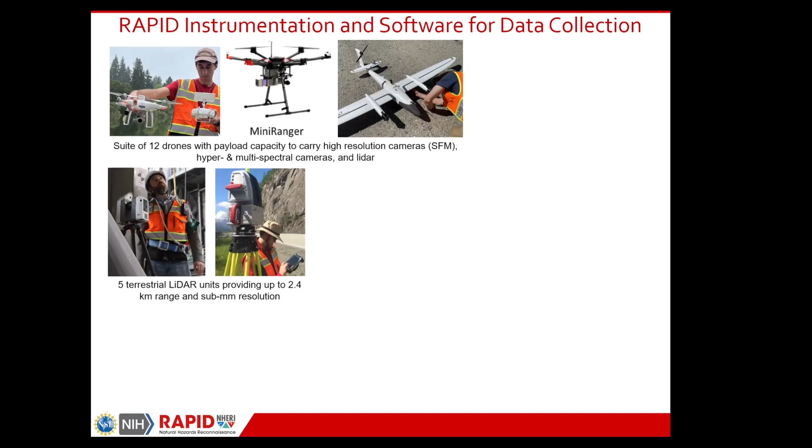This is showing some of the instrumentation that we have. We have 12 drones that can take a variety of payloads, from multispectral cameras through to just high resolution cameras. We have 5 terrestrial LiDAR units that provide both very high accuracy as well as large range. We have total stations and GNSS systems so that you can make sure your data are located globally.

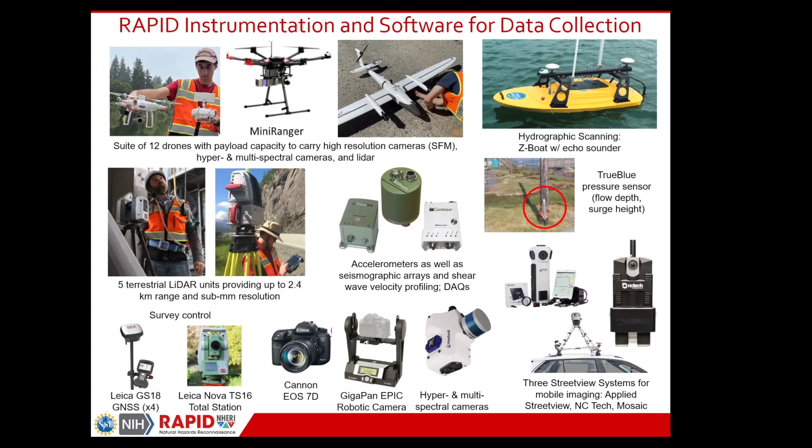We also have accelerometers, high resolution and multispectral cameras, and hyperspectral cameras. We have pressure sensors so you can get flow depth and surge height from hurricane-induced flooding. And then we have multiple street view systems that enable you to collect large point cloud or image data sets that can then be used to generate point clouds.

Some of our newest equipment is health and exposure instrumentation. This enables you to look for contaminants in the soil, to do water testing. We have some water sampling systems that can be drone mounted, so you can fly your drone out over the lake and get a water sample.

We have the drone mounted hyperspectral imaging. Hyperspectral imaging collects essentially images in wavelengths that go beyond the visible, and you can use that to detect chemicals in the environment. Currently we're looking at using that - I've personally been involved in a project that's using it to look for corrosion products, but you can look for a variety of different kinds of contaminants.

The Bruker system enables you to do some in-field processing to see if contaminants are in some of the samples that you're collecting. And we find that the Street View system can be really useful also for public health and exposure research. And then we have a number of instruments that can be used to collect air quality data as well.

In addition to all that, we have field laptops that can be used for preliminary data processing. In the lab, we've got servers in our rapid facility that provide access in the short term post-deployment for data storage and then preliminary processing of your data. And we have data processing servers that you can access to do structure from motion and deal with some of the really large data sets that come in from other instrumentation.

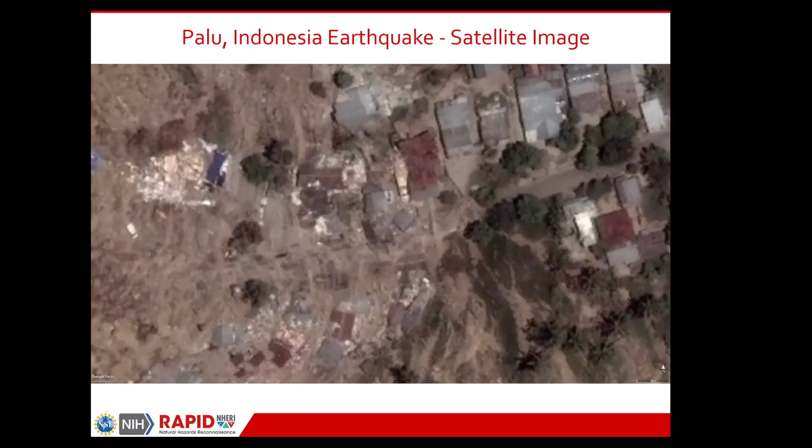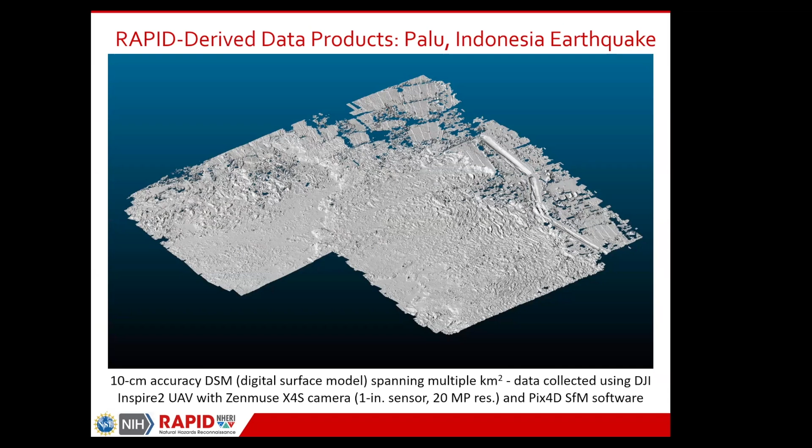Using structure from motion software, it's possible to generate a 3D point cloud of the surface area. This is what that 3D point cloud looks like. You can go in and take measurements and figure out what the elevation of the surface is, what the depth of the landslide area is, etc.

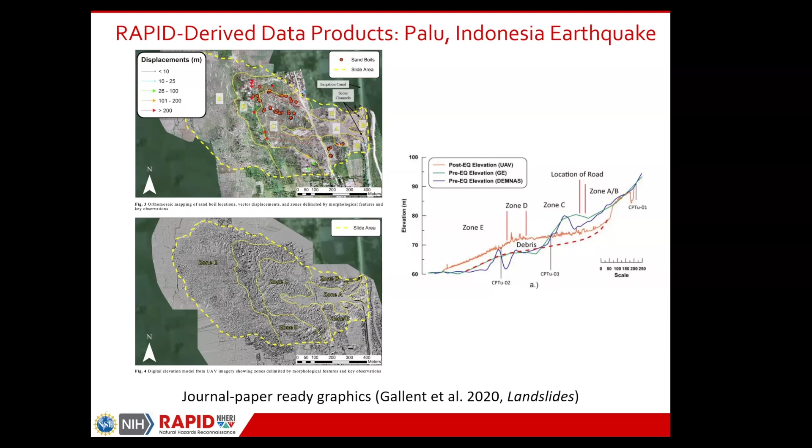The red line is the estimated bottom of the debris flow after the landslide, with the area between the orange and the red being the volume of debris. Using these data, it was possible to get an estimate of the volume of that debris flow and the full effect of it, based on the preconditions and the post conditions. Really valuable information coming from those data, collected just using cameras mounted on the drones and structure from motion technology.

This is another example, looking at a large building damage case, this was post Hurricane Michael, also in 2018, and initial STEER field assessment identified damage to a lot of large volume buildings. A PI from Auburn wrote a rapid proposal, got NSF funding, and then the rapid team went into the field to support activities to collect information on these large volume buildings.

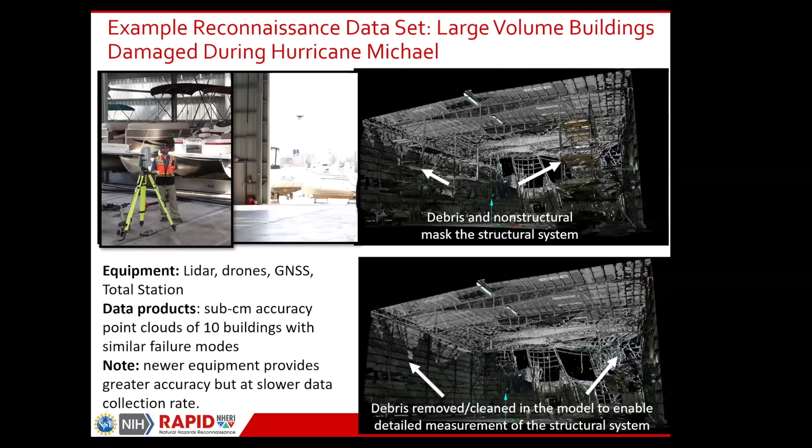This is showing on the right some of the data that was collected using LiDAR equipment. This is mostly terrestrial LiDAR. This gives you an image of the fly through of what those data look like. This is all highly accurate point cloud data.

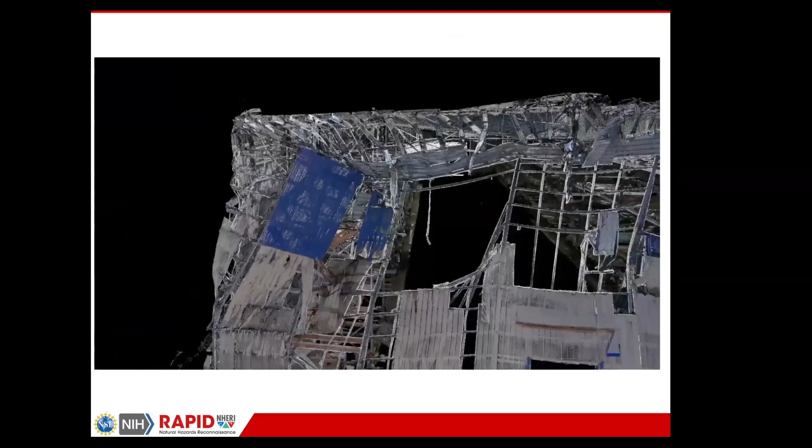You could go in and measure the size of that beam, measure the volume of the building. Using that data, the research team was able to identify the damage to these large volume buildings and come out with data showing there was a common failure mode for 10 of these large volume buildings, determining there was compression from windward wall pressure and then bending due to uplift, causing failure of these roofing systems.

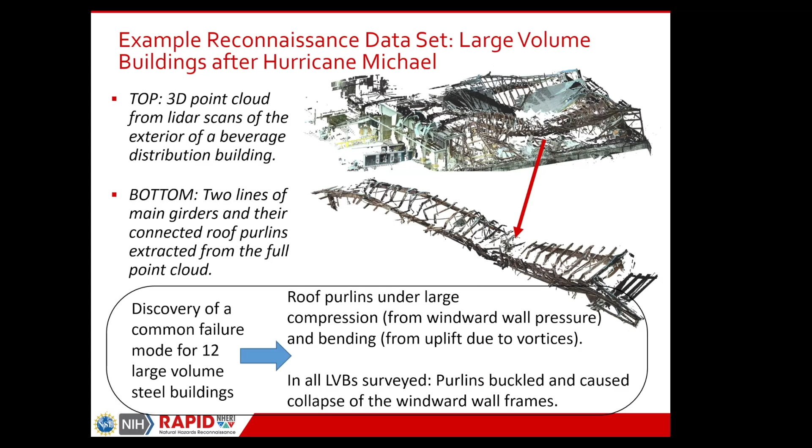A really productive project that started with the rapid steer going in very early, saying, hey, this looks like it might be an issue. This team wrote a rapid proposal to NSF, took the equipment into the field, got data, and eventually came out with a solution to the problem.

This is another data set that came out of the 2025 LA wildfires. This image shows where data was collected in that fire area. There were street view systems mounted to cars, and they drove all those blue lines you see in the top left. There was also high resolution digital and multispectral camera data used to collect data in that region, shown in the top right.

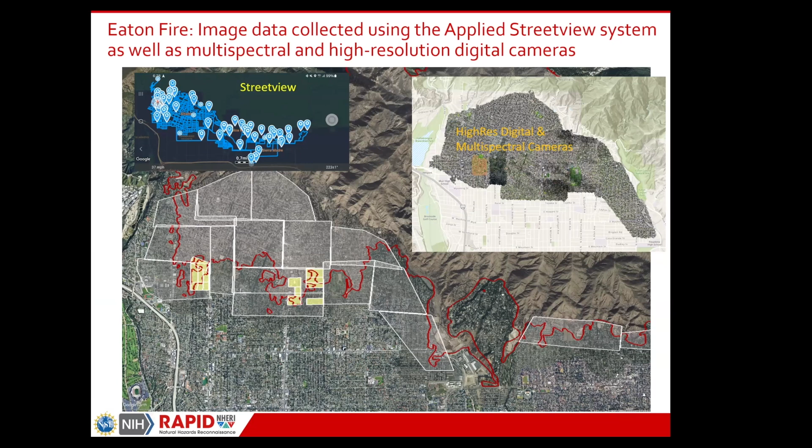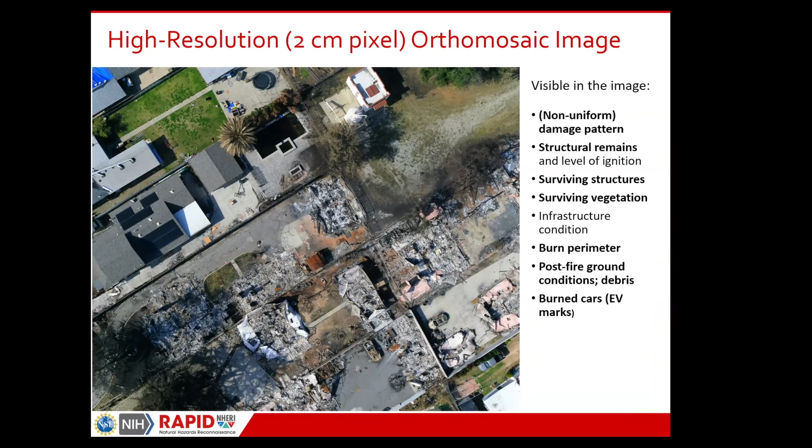This is showing you some of the images that came out of that. You can see from these images that there is non-uniform damage patterns. I don't specifically see it here, but there were places where first responders had noted that electric vehicles, marked EV on the ground, had been burned. You can certainly see the burn perimeter, damage to vegetation, and the surviving vegetation and surviving homes.

Okay, so those are all the exciting things that you can do with rapid equipment. Next step: if you're interested, I would highly encourage you to participate in our summer 4-day training workshop. It happens in July when it's nice in Seattle. It's just a great opportunity to learn more about the facility and the equipment that are available.

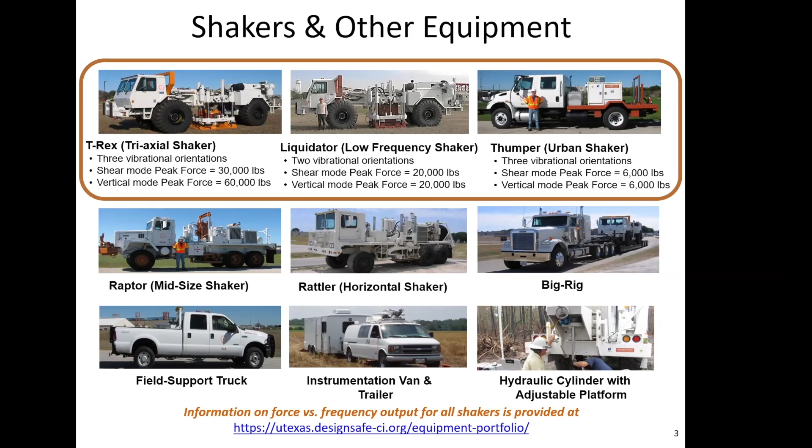We then have these other 2 trucks, Raptor and Rattler. These are just other older Vibroseis trucks that we acquired on donations from oil exploration companies or national labs. Raptor can shake vertically and Rattler can shake horizontally. Then we have big trucks to haul these around with, field support vehicles, vans, instrumentation trailers, all kinds of stuff like that. On the back of our 2 largest trucks, Liquidator and T-Rex, we also have CPT pushing capabilities, so we can push cones and other instrumentation into the ground.

In terms of our instrumentation, we have a lot of dynamic instrumentation. We have about 100 of these SmartSolo 3-component nodal stations. You bury these in the ground or push these spikes into the ground, and they'll sense XYZ shaking. They are each GPS synchronized, so there's no cables that run between them. A lot of people use these to put out grids of sensors on the ground surface, for example.

We have this fiber optic distributed acoustic sensing interrogator, a DAS IU. These are really popular right now, and a lot of people want to use these in their research. To purchase a DAS interrogator like this is somewhere between probably $150,000 to $200,000, so it's not easy for people to get access to one. If you know what that's for and you're interested, we have one available in our equipment portfolio. We also have lots of vertical and horizontal 1 hertz geophones. These have to be connected with cables.

We have several hundred 4.5 hertz geophones and other 24-channel seismographs that you can use, and about 20 broadband Nanometrics seismographs or seismometers with digitizers for recording aftershocks or horizontal-to-vertical spectral noise ratios, deep surface wave testing, and similar work. We also have other dynamic signal analyzers and data acquisition systems, load cells and accelerometers, plus CPT equipment and liquefaction sensors that we're not showing here.

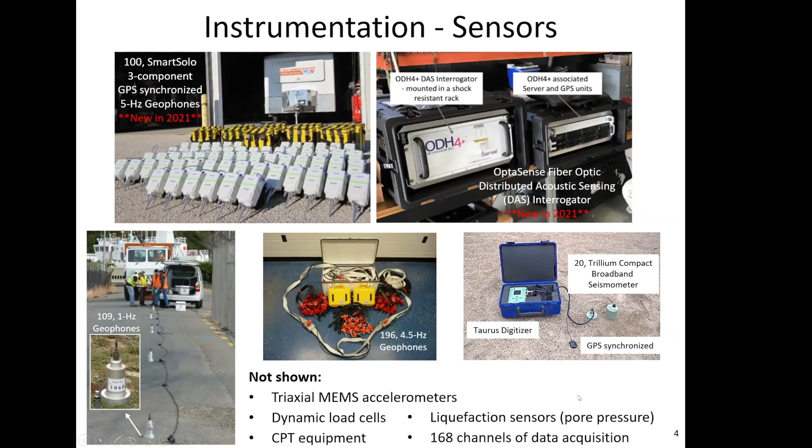A little more information about DAS in case people aren't aware of its capabilities. Distributed acoustic sensing works by having an interrogator send a laser pulse down a fiber optic cable. That pulse travels at the speed of light to the end of the cable and back. There are small imperfections in the fiber that reflect light back as the laser travels, and we record those reflected light transmissions. As the cable stretches longitudinally, due to dynamic movements or even low frequency, nearly static movements, we can sense strain along the cable.

The cool thing about DAS is that our particular interrogation unit can record a fiber optic cable up to 30 kilometers long, with 1 meter channel separation along that cable. So you can have essentially 30,000 dynamic sensors along the fiber, making it incredibly dense for spatial sampling. We can also sample in the time domain up to 100,000 hertz, or 100 kilohertz, for cables less than about a kilometer long.

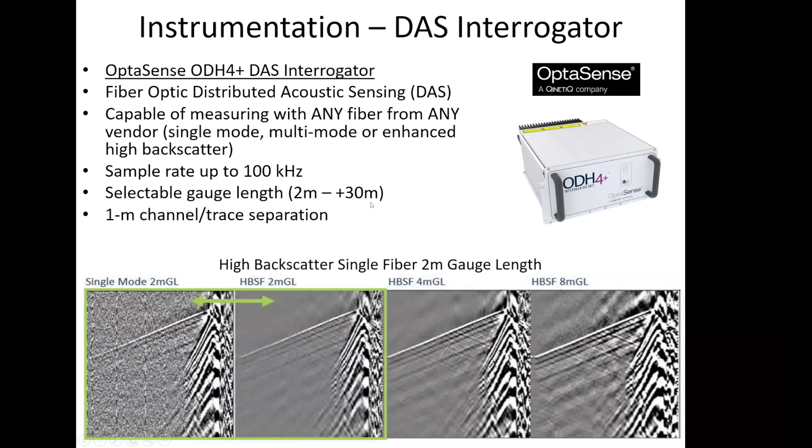We have several open source DAS data sets that have been published on DesignSafe. Some people just like to have access to DAS to see what the signals look like, so we've published three open source DAS data sets over the past few years related to various subsurface imaging projects. You can look these up on DesignSafe if you want and gain access to them.

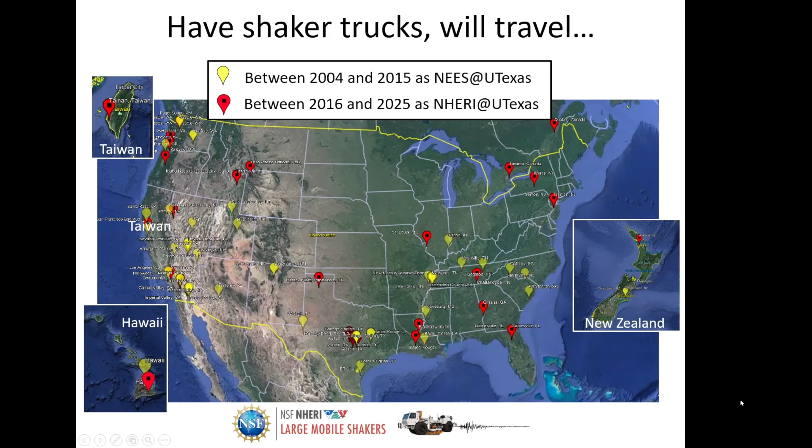So there are some challenges associated with doing this, and there's a lot of uncertainty at times in developing images of the subsurface, but that's one of the major things we focus on.

So we'll shake the ground and measure the nonlinear soil behavior in terms of shear strain, modulus, and pore water pressure generation. The last thing would be structural health monitoring, where we've done projects putting instrumentation on a bridge and shaking it in various directions, vertically and horizontally, monitoring its response mostly in the linear strain range to keep things safe.

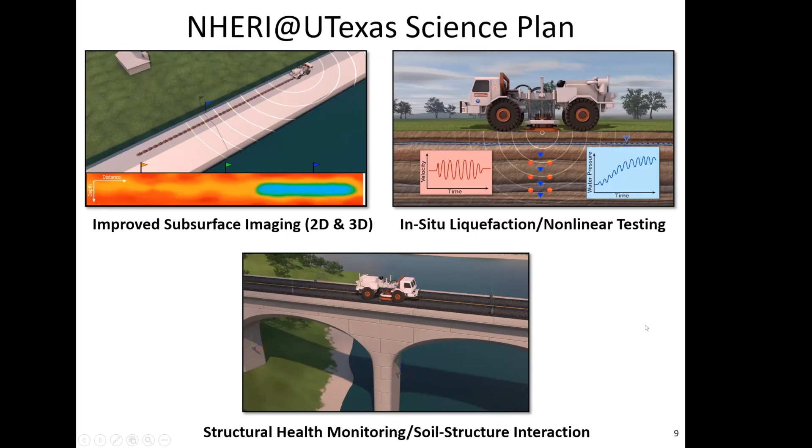I have some example projects listed here. I'm not going to go through these in detail, but just to give you a snapshot of some of the types of work we've done in the past few years.

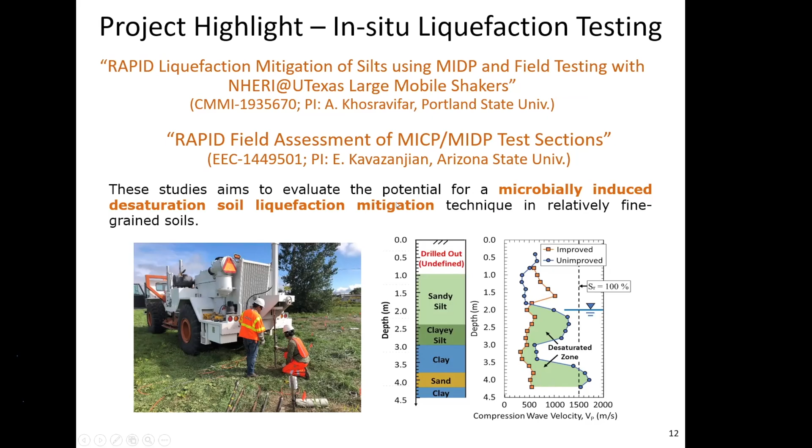But if we install one of these augers, we can push instrumentation down to greater depths, and then shake on top of the auger stem to induce shaking at greater depths, allowing us to build up strains deeper in the ground.

So this is work that was performed with Diane Moug from Portland State and Ed Kavazanjian, at two different locations, one of them in Hawaii and one of them, I'm trying to remember if this one was up in Canada. I can't remember exactly, so I apologize for that.

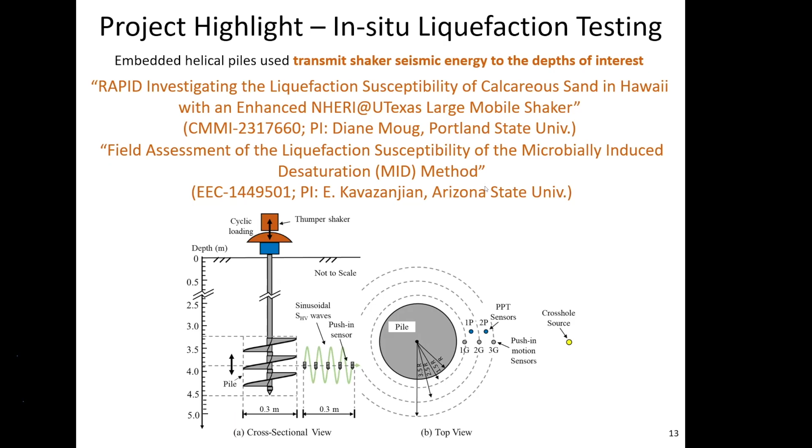Some other work that's been done, this is a project from PI Mo from the University of Houston, where he was looking at developing periodic metamaterial barriers. These barriers are designed and constructed so that they essentially block, or filter out, frequencies that you can dial in according to the design of these elements. So you could target a certain bandwidth of frequencies that you would be able to isolate your building from, either in an earthquake or from, let's say, railroad vibrations or something like that.

So part of this project had a need to do some in situ testing to validate the functionality of these periodic metamaterial barriers, and we did that at the Hornsby Bend test site in Austin, Texas.

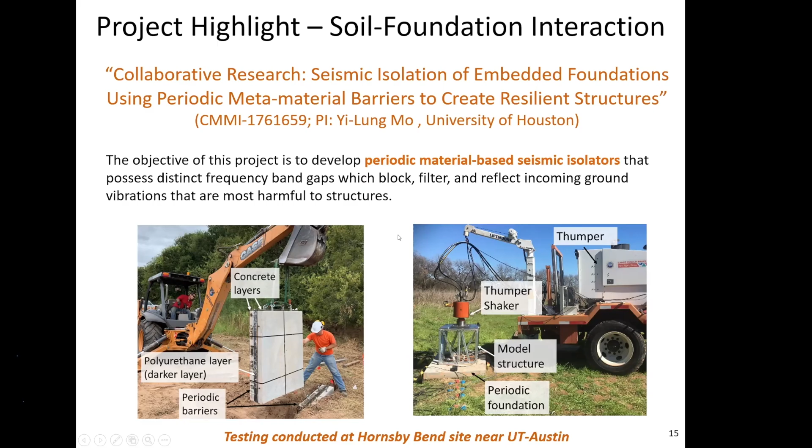Another project that we just wrapped up last year was with PI Alexis Ault at Utah State University. This was interrogating what they call the earthquake critical zone. There are a lot of pieces to this project, but one of them was related to taking our big shaker truck, Liquidator, to the southern San Andreas Fault near Palm Springs, California.

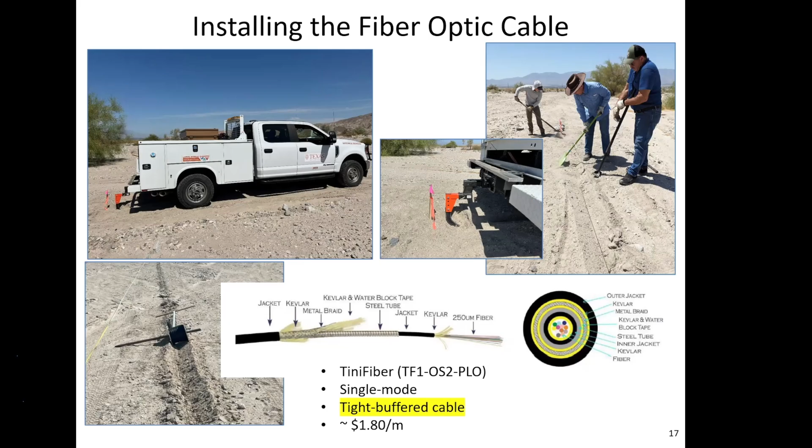Here's some pictures showing the installation of fiber optic cable across the San Andreas Fault. We installed about 1.5 kilometers of fiber optic cable, which cost about $1.80 per meter on average. But once the fiber optic cable has been installed, you have essentially a sensor every meter along the cable.

We also installed a bunch of nodal stations, and every dot you see here, every 10 meters along this cable, we shook with our truck, and we also hit with a sledgehammer. There's some mapping where they had mapped the fault location at these blue lines here, but there were some instruments detecting creep or movement showing the fault was located in a different location. So we were there trying to identify where the actual location of the fault was.

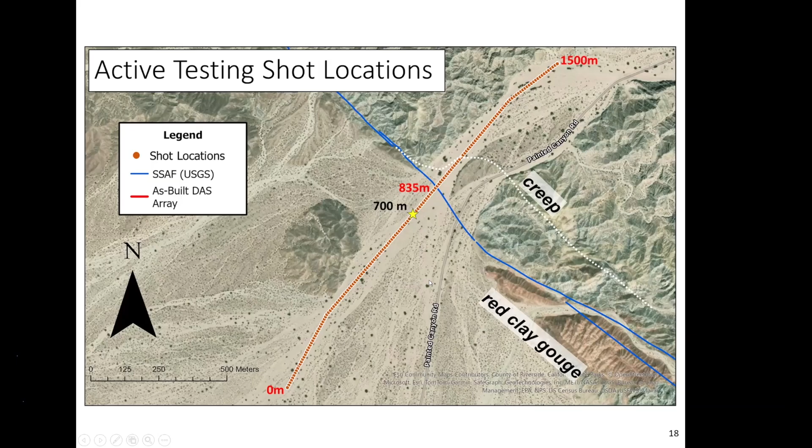So we did some testing, using sledgehammers as well as several sweeps from our big truck, Liquidator.

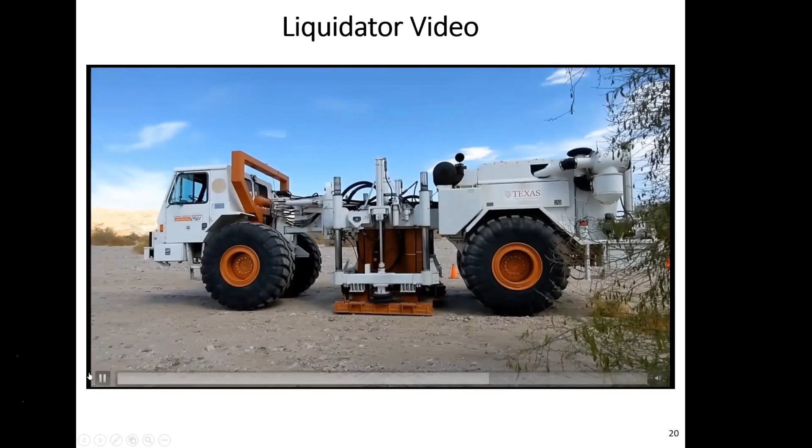So that sound is pretty annoying to me, so it's probably annoying to you as well. I'll skip through some of that.

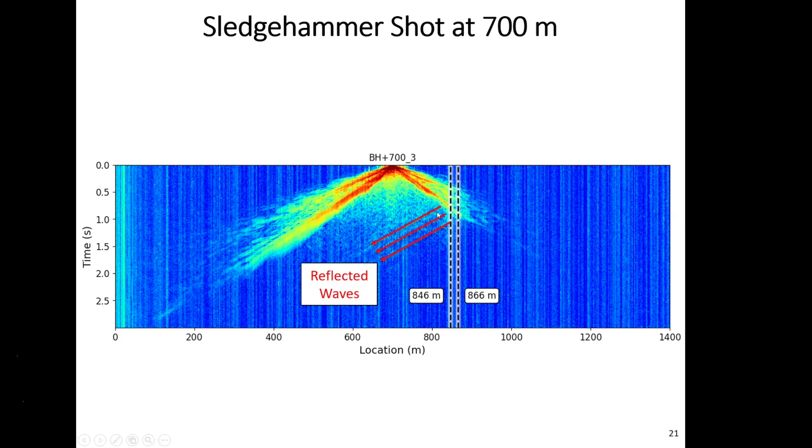This is some of the output from our distributed acoustic interrogator, where you're looking at 1,500 meters of fiber optic cable, and this is one sledgehammer blow along the cable at a distance of 700 meters from the beginning. You can see how the waves are greatly attenuated on one side of the fiber optic cable versus the other, because these waves are being reflected back by the fault. So just by looking at the waveforms in the time domain, we can see the location of the fault.

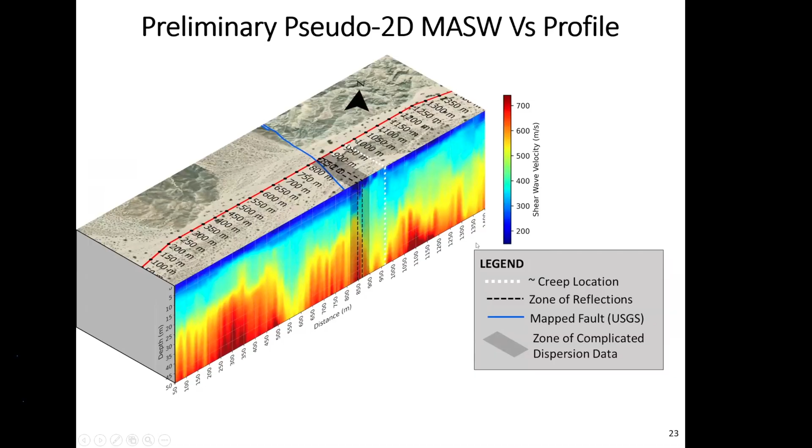So these are some of the capabilities that we have with our equipment at the University of Texas.

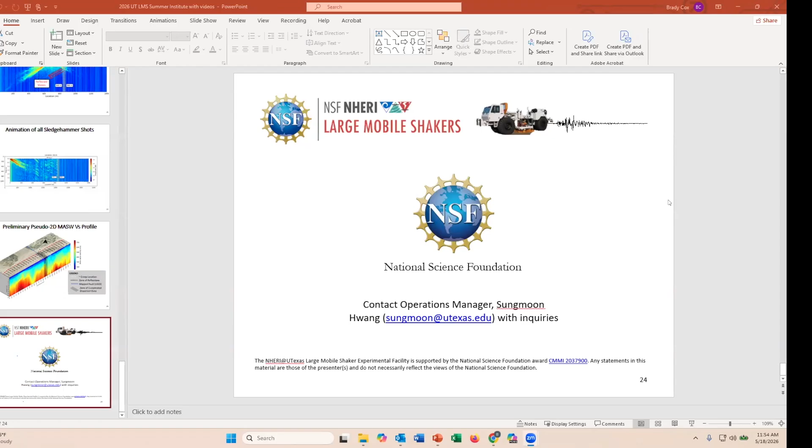While you're doing that, I'm just going to go ahead and read this one. What is the maximum depth that can be detected for subsurface imaging?

It depends on the method of imaging you're using. If you're doing something like traditional seismic imaging, like reflection profiling, you can look very deep, many, many kilometers. But the type of imaging we're often doing with full waveform inversion and three-dimensional imaging, we're typically profiling the top

tens to 50 to 100 meters, something like that. And if we're doing surface wave testing, it's pretty common that we'd be able to look down hundreds of meters, 200, 300, 500 meters even, with our trucks and instrumentation, but that would be a 1D type profiling. So in 3 dimensions, tens to 50 meters, let's say, one-dimensional shear wave velocity measurements down to hundreds of meters.

And then if you're doing something like reflection testing, where you're really just getting an image of the subsurface without super accurate travel times, then that would be kilometers. You're welcome.

Do the large mobile shakers at the University of Texas have any local testing areas near Austin where researchers can run proof of concept or shakeout tests without needing to pay significant charges for mobilization?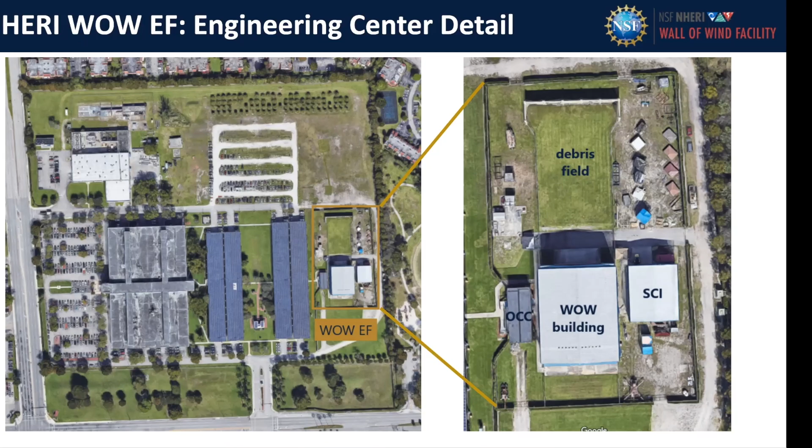Okay, here are some close-ups of the wall of wind building and the staging area.

We have flow management systems that can be used to simulate atmospheric boundary layer flows, which is realistic simulation of natural wind. We also have rain nozzles that we can use for a wind-driven rain system. Based on the requirements of testing, we can adjust these roughness elements to create different profiles, and we have a journal paper that details all the different profiles and turbulence parameters we can generate.

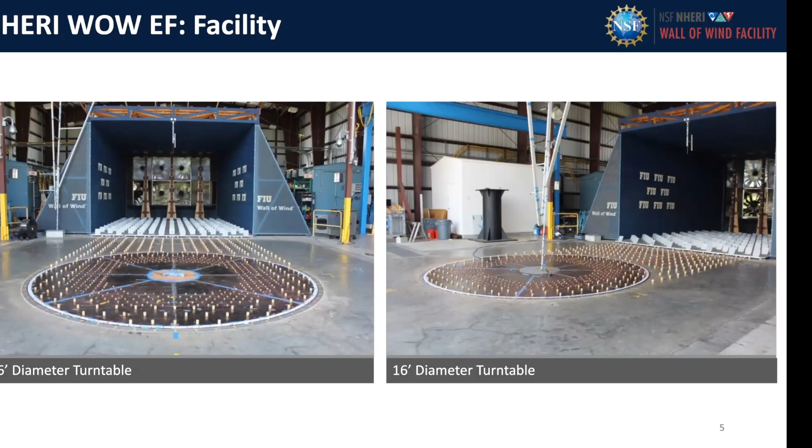Here's a view of the turntable. We have a 16 feet diameter turntable here on which we can put models, and we can change the direction of the model so we can study the wind direction effects on the models. Here is a video.

Osam, can you play this? Robin, can you see the video? We can see the video, but we don't hear it. The wall at Florida International University, now we do.

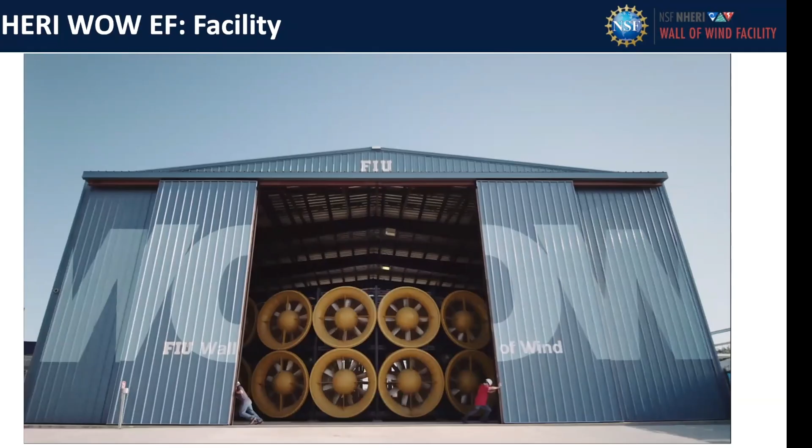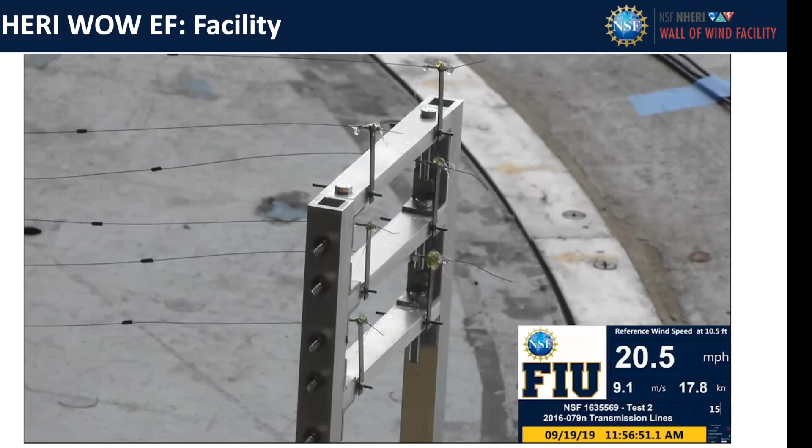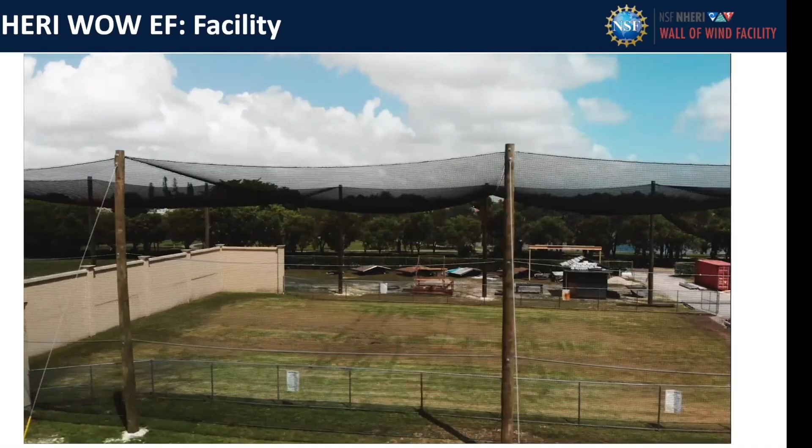This NSF-funded facility enables researchers to better understand wind effects on civil infrastructure systems in order to prevent wind hazards from becoming community disasters. The NHERI Wall of Wind experimental facility is powered by a combined 12-fan system capable of repeatable testing up to 157 mile-per-hour wind speeds. One advantage of the facility is multi-scale and high Reynolds number simulation using 12 fans and a water spray system, which demonstrates the effects of wind and wind-driven rain. The 16,000 square foot fenced-off secure area enables researchers to plan and perform destructive tests for up to Category 5 hurricane wind speeds, using a wide range of equipment, instrumentation, and experimental simulation protocols.

At the end of the video.

So what you saw in this video is the uniqueness of the wall of wind in terms of full-scale testing, which is important so we can understand failure modes, which is not possible in a scale model. So we can do large-scale and full-scale testing to understand the progression of damage, and what that tells us is how we can retrofit structures, come up with various mitigation techniques, and test the efficacy of those techniques.

We have a team of full-time staff and faculty who support the NHERI Wall of Wind experimental facility. Some details about the facility: as I mentioned, we can do large-scale open jet flows.

Our wind field is 20 feet wide by 14 feet high, so you can put full-scale structures or subsystems. We can go all the way from, let's say, 20 miles per hour wind up to 157 miles per hour, which is a Category 5 wind speed.

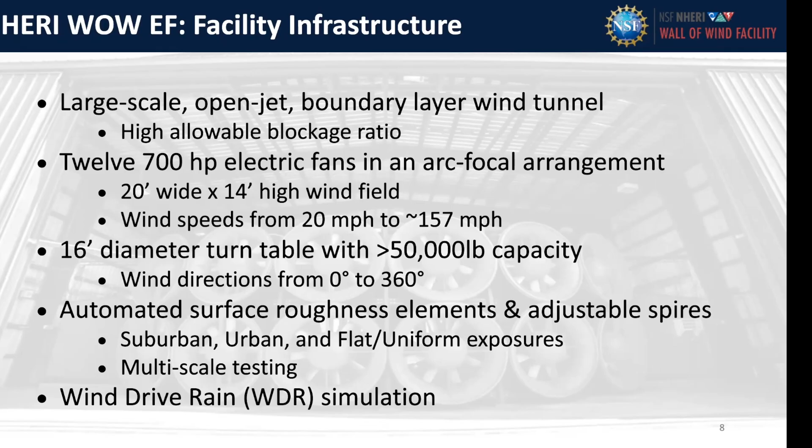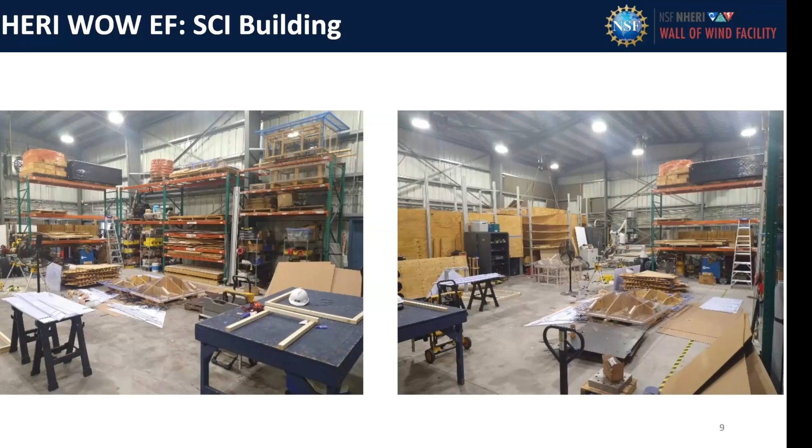Some pictures of the staging area where we can build specimens, then use a forklift to bring them to the wall of wind turntable and test them out. So we can prepare test models here for one project while doing testing for another project inside the wall of wind building.

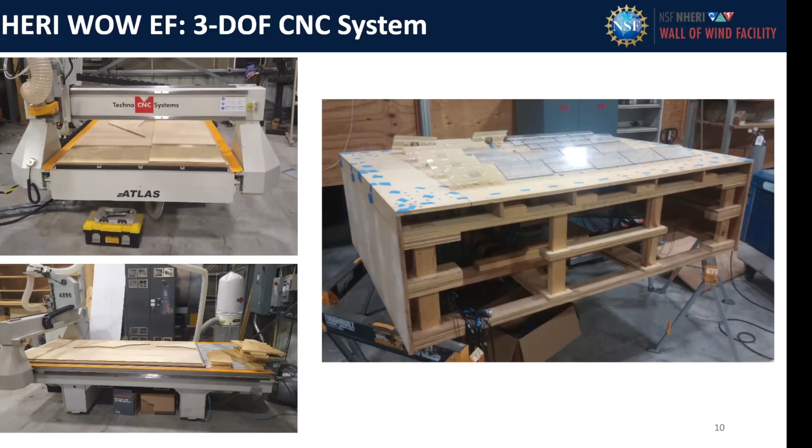We have unique testing capabilities. We can go up to a Category 5 hurricane wind speed, and we can do different scales. We can measure aerodynamic testing, meaning we can measure pressures, like here, measuring pressures on the solar panels using pressure taps. We can also do aeroelastic testing, where we can understand the effect of vibrations on the loading.

We can do failure mode testing, as some of the things that we saw in the video, like a roof failing, a metal roof panel vibrating and failing in fatigue, short-term fatigue. We can do wind driven rain simulations, and not only can we test buildings, but we can test scale models of bridges, transmission line lines, photovoltaic arrays, also in full scale.

We also have the downburst simulation capabilities for localized transient effects. We have done with Lehigh University real-time hybrid simulation, and we have a paper published on active model feedback. So that's another area that we can help the researchers with using real-time hybrid simulation.

Some idea on the scale effects. Most of the traditional wind tunnels can go up to a 1 to 100 or 1 to 50 scale on low-rise buildings, but we can go all the way from a 1 to 100 scale, which is the top left picture, to a 1 to 50 on the right, and then 1 to 10 at the bottom left, and finally also a 1 to 6 building. So we can study the effect of scaling on the aerodynamics of the building and also the effect of the Reynolds number on these aerodynamic loadings.

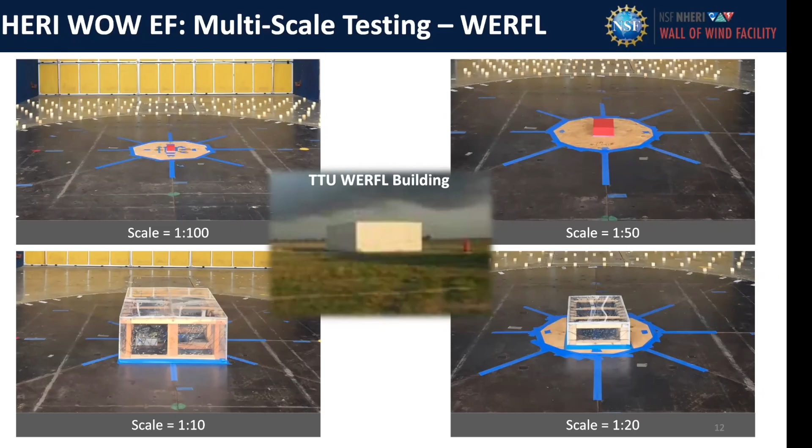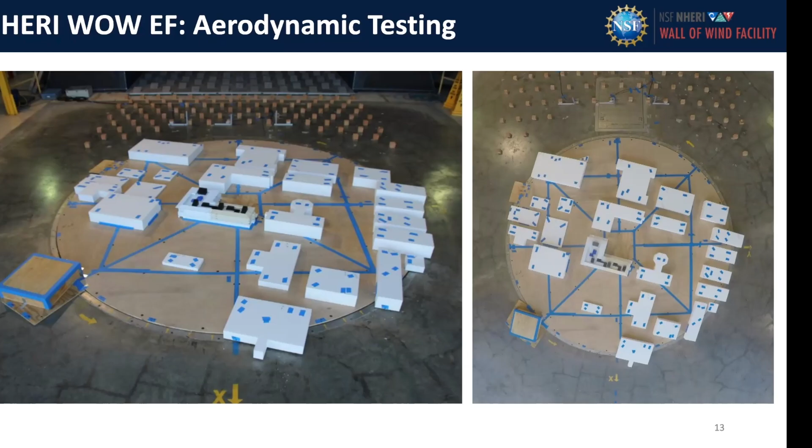Because we have a large turntable, we can understand the effects of the surroundings. This is another research done here by other researchers, I think by Dr. Gorlé from Stanford University. The middle building is the one where we are measuring pressures, and then we have surrounding buildings using foam blocks or other elements that produce the surrounding effect. So you can look at Venturi effects, flow acceleration, and those kind of things which are dependent on the surroundings of a building. You can do this kind of large scale modeling using the Wall of Wind.

This is a project on a transmission tower system. It's again a scale model, but looking at effects on the lines of the transmission tower system and also on the tower itself. We have accelerometers and strain gauges, and we can also have load cells. This is an aeroelastic model of a transmission line system.

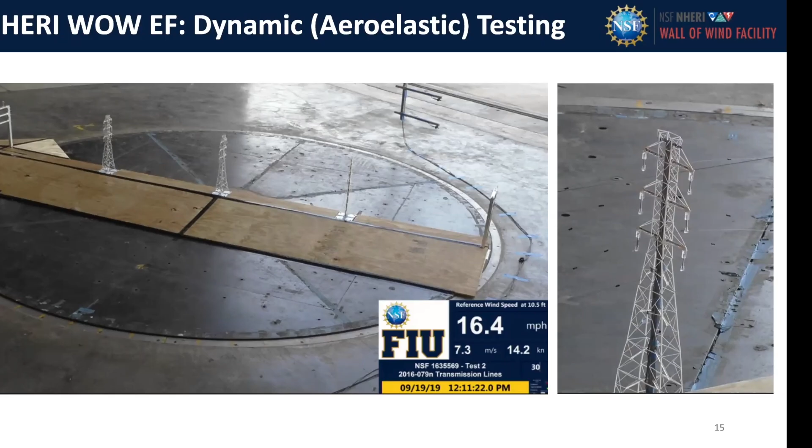We are testing at the Wall of Wind. Hussam, you can play the video maybe on the right-hand side. Here you can see the vibrations, and all the relevant modes of the structure are taken into account while we are doing the aeroelastic modeling - the modes of the transmission lines as well as the modes of the tower itself. We can understand the wind effects on these kinds of systems and then come up with either code suggestions or retrofitting methods.

Full-scale solar panel being tested. The original structure was in Central Washington University - you can see the bottom picture, which shows the actual 3-story building. On top of that we have the PV panels, and the red circle shows what panels we are simulating at the Wall of Wind. Now on the top pictures, we have a full-scale array of the solar panels, and underneath that we have the framing, and we have load cells, as you can see, measuring the wind loads from various directions.

So this gives you an understanding of the range of the testing that we can do. We can go all the way from a scale model with pressure measurements. We can test at different scales to understand Reynolds number effect and scaling effects.

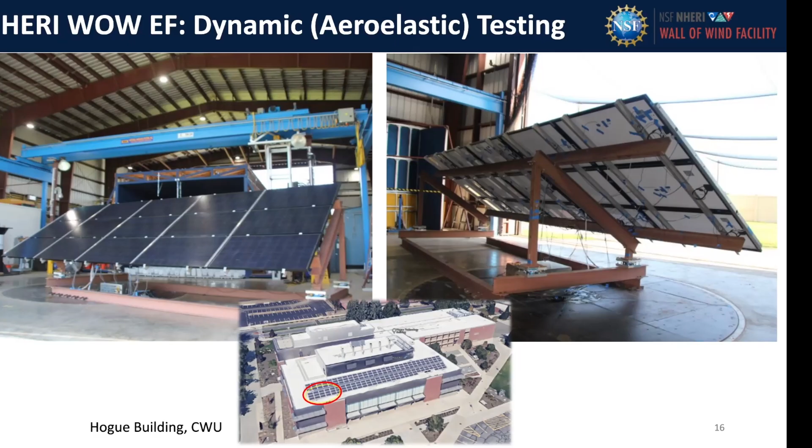You can do aeroelastic modeling of, let's say, transmission towers, and then you can also do these kind of dynamic testing using the actual PV arrays to understand the effect, not only from the turbulence of the wind, but also the resonant effect created by some of the wind frequencies matching with the structural frequencies of the system.

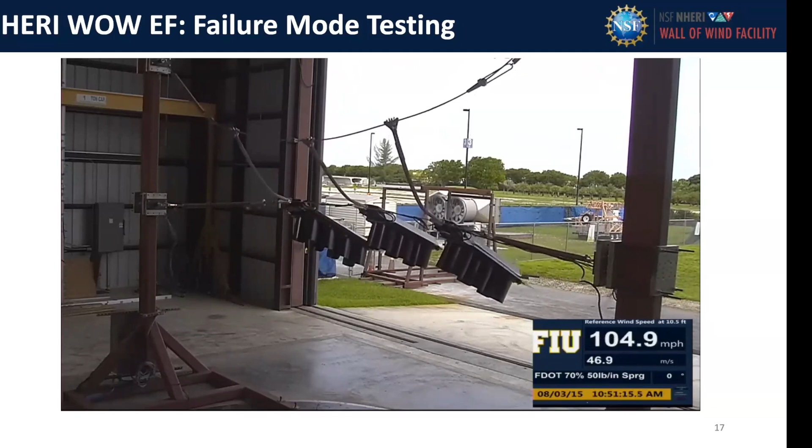We can play this video. This is an interesting video on traffic signals. Because we can simulate these at full scale, the wires and the signals themselves, you can see the wind speed increasing, and then we have aerodynamic instability being captured. You can see very large vibrations, which leads to failure of the systems.

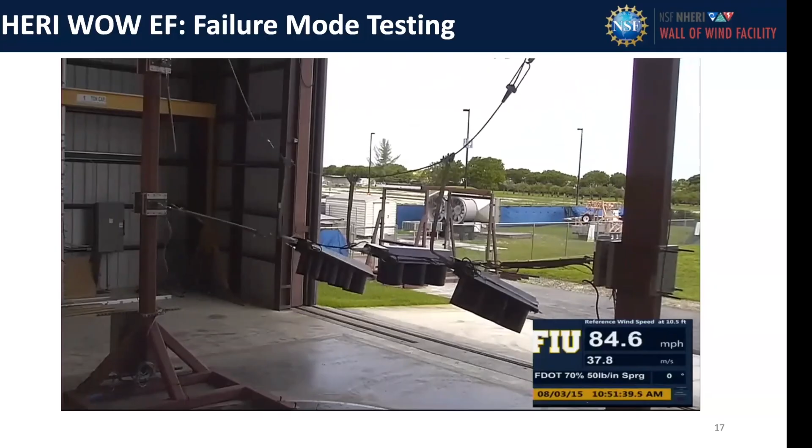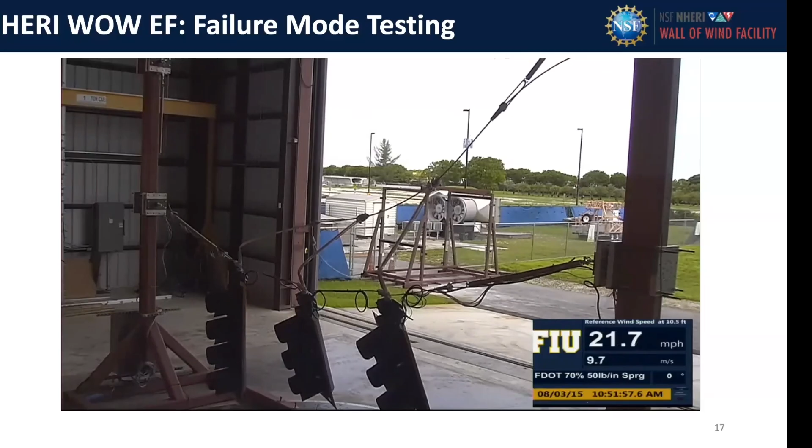So the full-scale nature of our testing makes this advancement of knowledge possible, because now you can learn how the system performs at full scale, and from there you can come up with either enhancing the design or using retrofit techniques or mitigation techniques to reduce the risk of the damage.

Is that a video you want to play? So this is... okay, these are shingle systems, I guess.

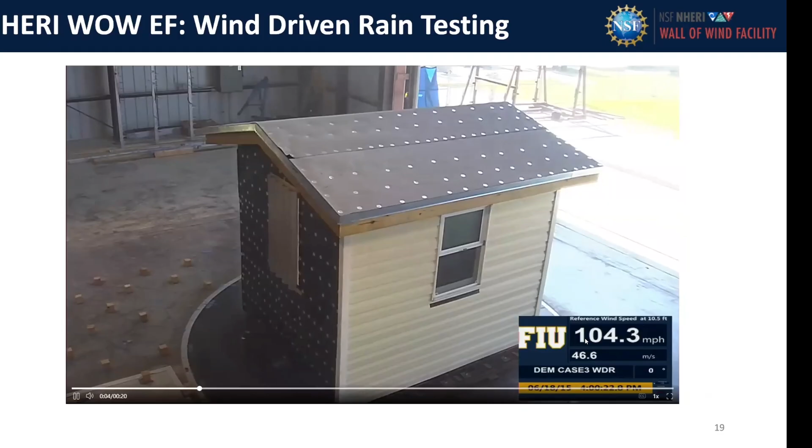Is this a video? Yeah, it is. So here, what you're seeing is wind-driven rain. It's a little difficult to see, but we are impacting a window with a shutter, and we are testing the effect of wind-driven rain on the window with and without the shutter. So we are seeing not only how much the load on the window can be reduced by the shutter, but also understanding the effect of the shutter in reducing the amount of water that goes through a window.

One of the biggest damages or losses in hurricanes is wind-driven rain. So even when there is no external damage that can be seen, a lot of water can go inside defects and cracks of the building and cause a lot of interior damage. So at the Wall of Wind, you can understand the mechanisms for those kinds of wind-driven rain damage.

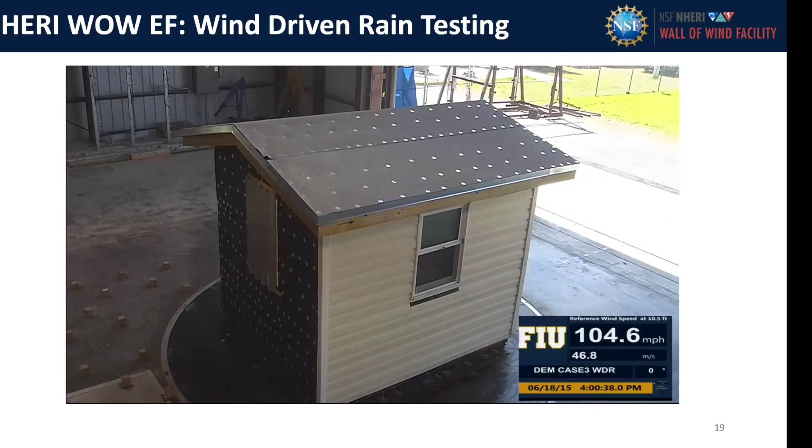You can understand the effect of the retrofits here. So this is another building being tested, and when we test the weak side, it fails like this. But we can also retrofit this building with stronger roof-to-wall connections, shutter systems, stronger roofing components, and we can retest it to understand if we can reduce the risk of these kinds of damage. And as we have the debris wall, we can catch some of this debris.

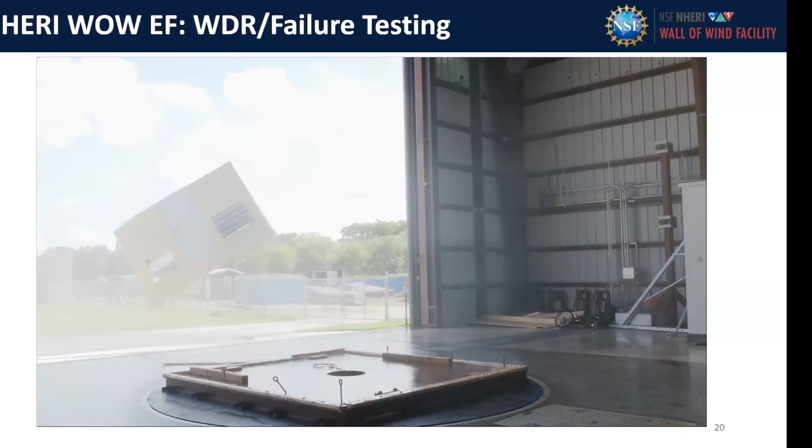This is a real-time hybrid simulation testing. I don't think this is a video, but again, here, go back. Here we are seeing a model that has actuators. This model has a tower on top, which can be thought of as a communication tower on top of tall buildings. So here we are using real-time hybrid simulation, where we have actuators giving the correct displacement calculated by numerical models.

So we have a numerical substructure being simulated somewhere else, and then we have the physical testing, which gets information from the numerical simulation and updates the deformation, so we can understand the aeroelastic effect.

And we can also study the effect of dampers to reduce the amount of vibration and the response to the building. So this is the one where we work with Dr. Jim Ricles' team at Lehigh, and there is a collaboration between Lehigh and Wall of Wind.

So if you are thinking about real-time hybrid simulation using these two different facilities, one is the one at Lehigh that can do the real-time hybrid simulation, and the physical testing can be done at the Wall of Wind. You can combine them and do real-time hybrid simulation. There is a very interesting journal paper that has been published, and we have more publications coming to understand how we have advanced the knowledge through this kind of collaboration.

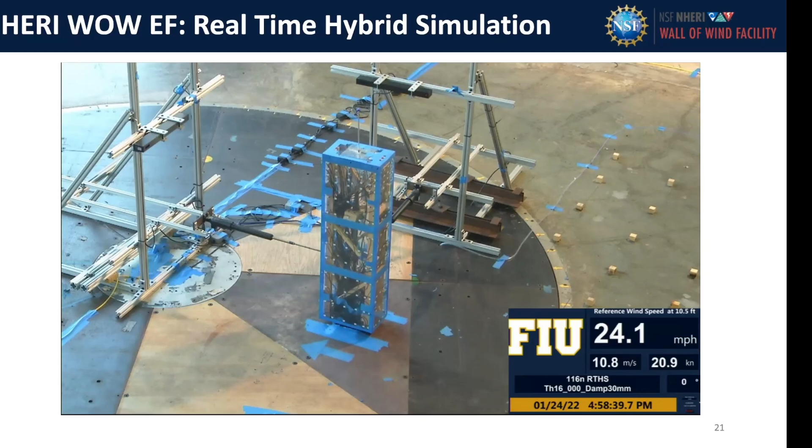This is the downburst, or transient, non-synoptic wind. So let's see if we can understand.

So as you are seeing those flaps on the other side, they open and we can produce a downburst effect on these kind of buildings. Do we have a smoke video here? Okay, so the next video shows the flow that's produced by the flaps. Okay, it's not playing.

So this is another system you can use. It's called particle image velocimetry. Here you can see a picture where you seed the flow structure, meaning you put seeding particles inside the flow, then shoot a laser to understand the evolvement of the flow around the structure. The green color shows the laser being flashed, and then you can see the particles.

As we get pictures of the particles moving along with the flow and the laser shining on it, you can have programs that calculate how the flow develops around the structure. It's a very advanced way of learning about the flows around a structure. You can correlate these PIV measurements with the pressures or loads on the structure, to understand the effect of the flow with the loads it exerts. So you can do this advanced PIV testing to understand flow effects on various kinds of structures.

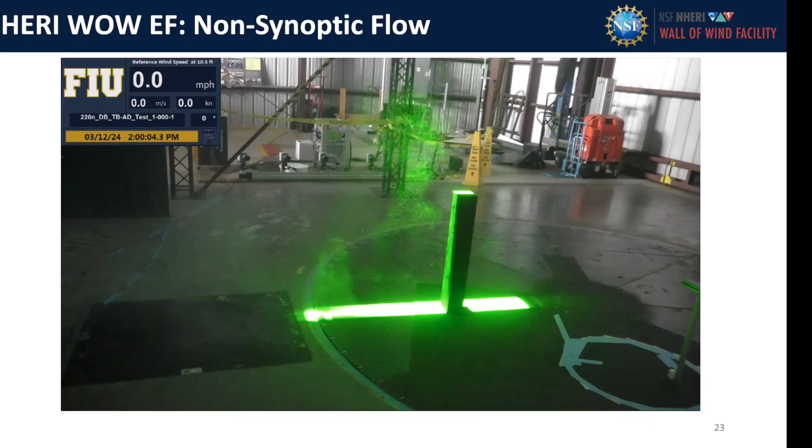This is a video of the PIV. We are testing, I believe, a plate, which is hard to see, but there is this window through which you can see the laser. And we are again understanding the effect of the flow on a flat plate here.

This was probably Dr. Chris Letchford's research, right? Yeah. So we have a flat plate supported by the side walls, and we are shooting a laser to understand the flow on a bluff body using the PIV system. These are very advanced techniques for understanding the flow and the effect of turbulence on the loading of the structure.

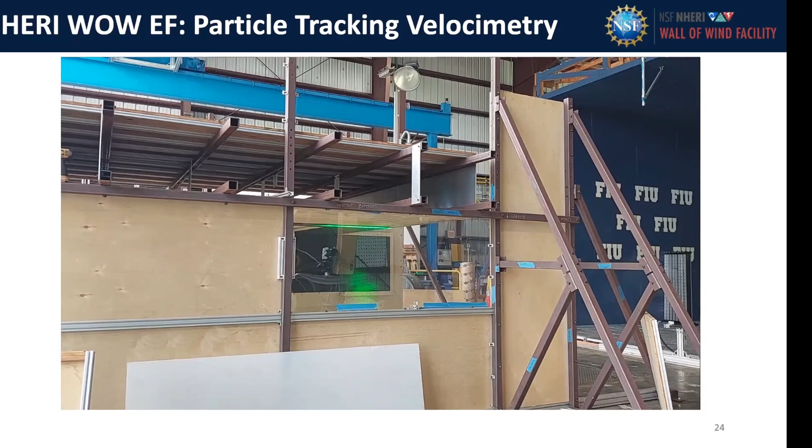Similar kind of research, but on a different structure: a wind turbine. This is done by Victor Maldonado from Texas Tech University, based on his career proposal. We are looking at the effect of wind on the blades of a turbine, and you can understand the tip vortices, which are often blamed for the inefficiency of some of these turbines.

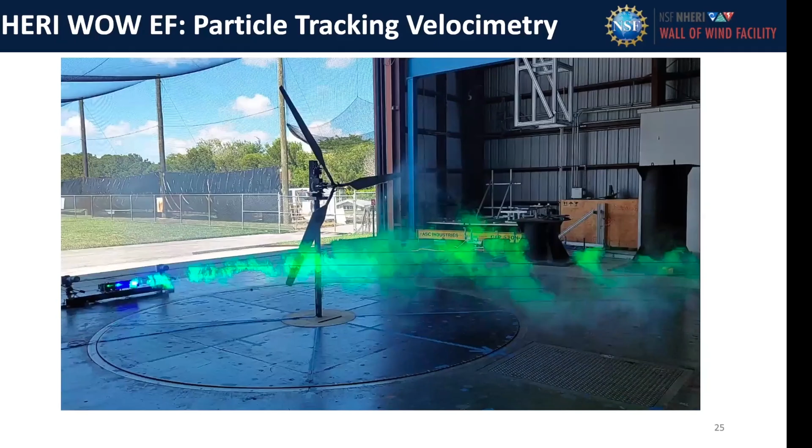But if you can have different techniques of reducing the effects of the tip vortices, then your performance increases. So Dr. Victor Maldonado produced almost a full scale turbine system and used PIV to understand the effects of the tip vortices and various approaches of reducing the impacts and increasing the efficiency of these turbines, which can be used for wind turbines, gas turbines, and helicopter propellers and things like that.

So we're just showing you the breadth of the testing that the Wall of Wind can do, all the way from buildings to transmission lines to these kinds of turbine systems.

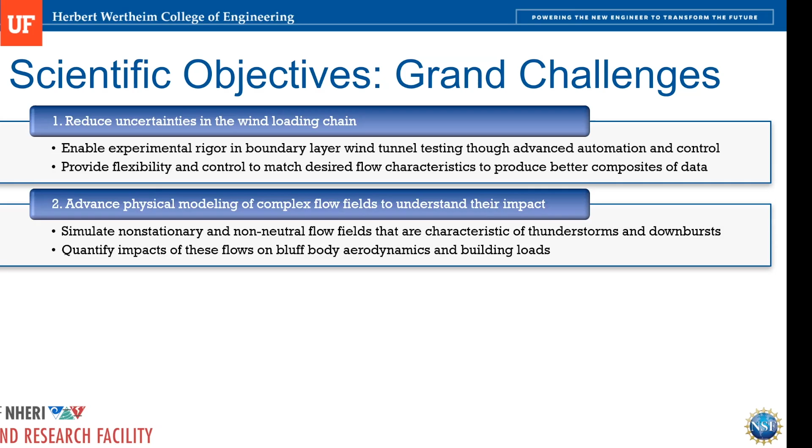We also want to go beyond what a standard traditional wind tunnel can do. Arindam talked about some of their capabilities. We have some of those as well, where we're able to simulate non-stationary, non-neutral flow fields that are characteristic of some really damaging impacts of thunderstorms and downbursts, and then quantify the impacts of those flows on bluff body aerodynamics and ultimately the building loads.

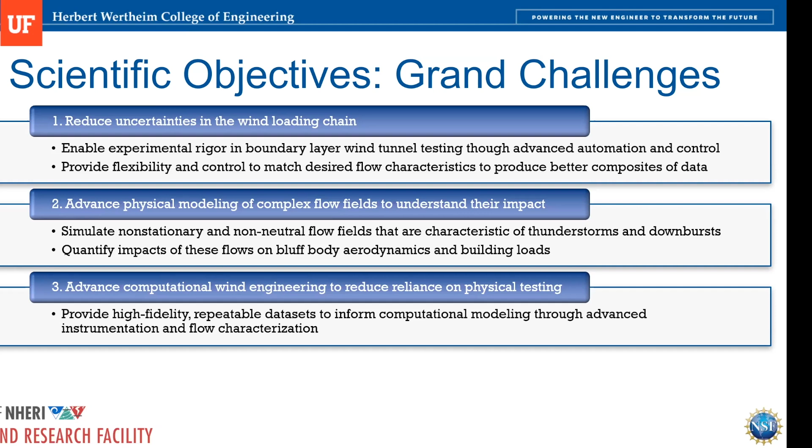Even though we're an experimental facility, we exist also in service of computational wind engineering. You really need data, especially with AI and machine learning tools, you have to have the primary data on which to build your models. Being able to provide those repeatable data sets that can inform computational modeling is a really important output of our facility. If you do work in CFD, as with all the other facilities, our data is available online on DesignSafe. So if you're looking to do validation or get started, even without dipping your feet into experimental work, we can support that.

We want to advance automation and design of hazard-resistant infrastructure, promoting experiments to validate hazard resistance of emerging and automated design approaches. We also support cyber-physical wind tunnel testing and structural optimization. Machine learning is baked into everything we do, not just the specific experiments, but even the control of the various components of the wind tunnel to ensure we're achieving the flow conditions we want.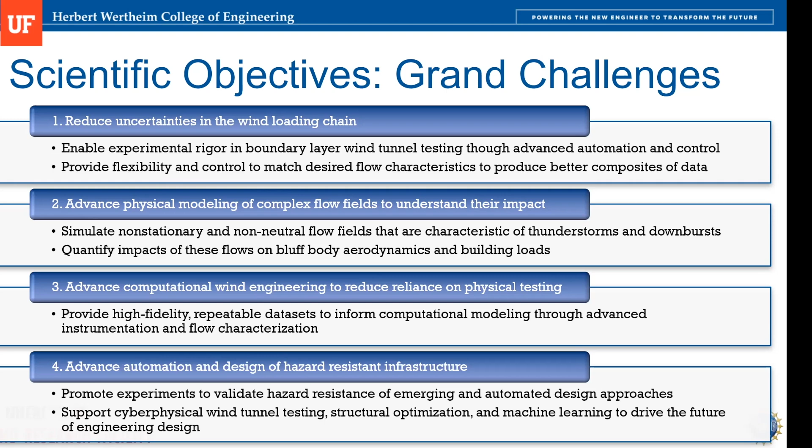So the challenges in a typical wind tunnel - this terraformer has been something that's more of a manual process. In traditional wind tunnels, you might kind of manually place these, have a few terrain conditions available to you.

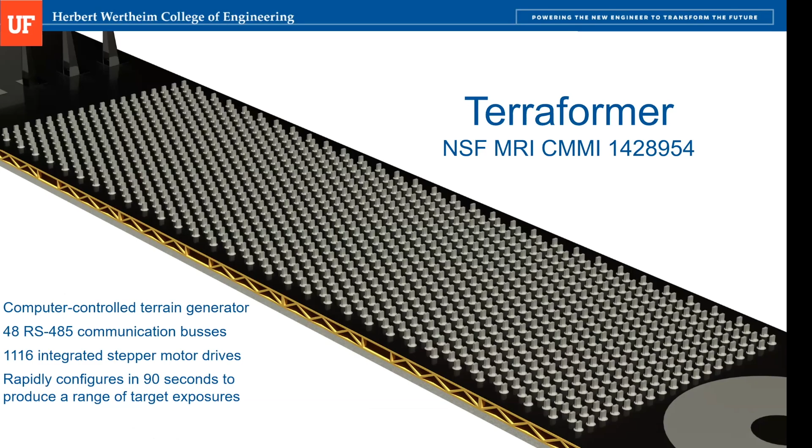However, our terraformer is unique in the sense that we've got over 1,100 elements that come up out of the floor at the push of a button. In under 2 minutes, we can dial up these elements. They range in height from 0 centimeters up to 16 centimeters. You can orient them with the wide edge windward or the narrow edge windward, and it can be homogeneous, but of course you can also have heterogeneous configurations.

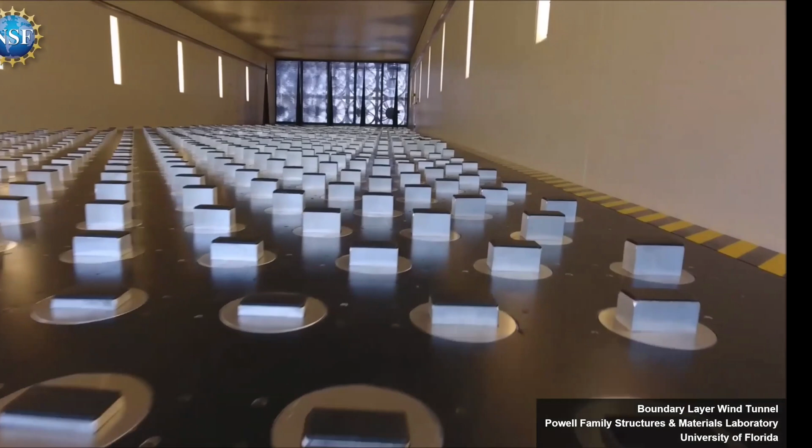And we have closed form solutions. So if you know the flow conditions that you want at your test section, we have a closed form solution to figure out what terrain, what configuration of the terraformer is going to allow you to achieve those flow conditions.

And so what this allows us to do is very quickly move through a test matrix. So you have a lot more opportunities to look at a continuum of flow conditions rather than just an open, a suburban, an urban type of terrain. So this is where a lot of our researchers are exploiting the automation here to actually have very large test matrices that they can move through.

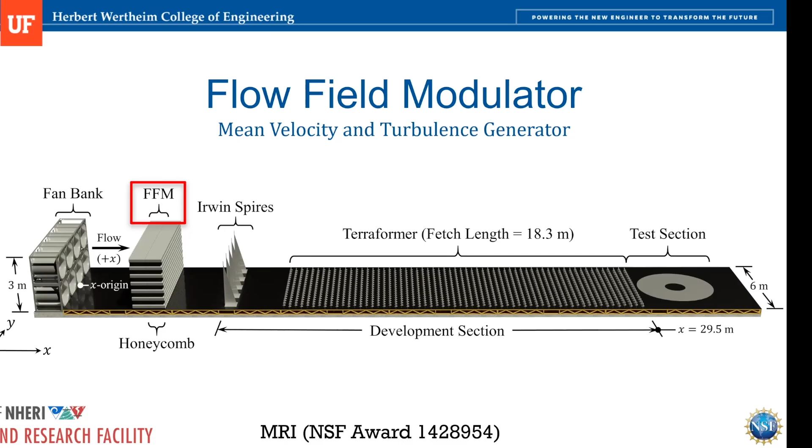Let me show you a better picture of what this looks like. This is 319 individually controlled fans. They have pretty high frequency response. You can run them forward, you can also run them backward. This really allows you to shape the profile of the flow. So instead of just having a typical neutral boundary layer profile, you can now have a gust front profile, where maybe you have higher wind speeds down below, lower wind speeds up at the top. We're still working on characterizing all of what this can do. There's just a lot of degrees of freedom with 319 fans, all individually controllable.

So while this is an experimental capability we offer to our researchers, and we certainly know how to converge on a lot of different profiles, it's also an active area of research, and we welcome users that are interested in helping us characterize and shape the control of the flow field modulator.

So specifically, what does it allow us to do? I already mentioned it allows us to achieve simulation of non-stationary events - these kind of gust fronts that happen really suddenly, where you have a rapid evolution of the flow and then it changes. So the statistics are not consistent in the flow, and you really want to capture those peak gusts.

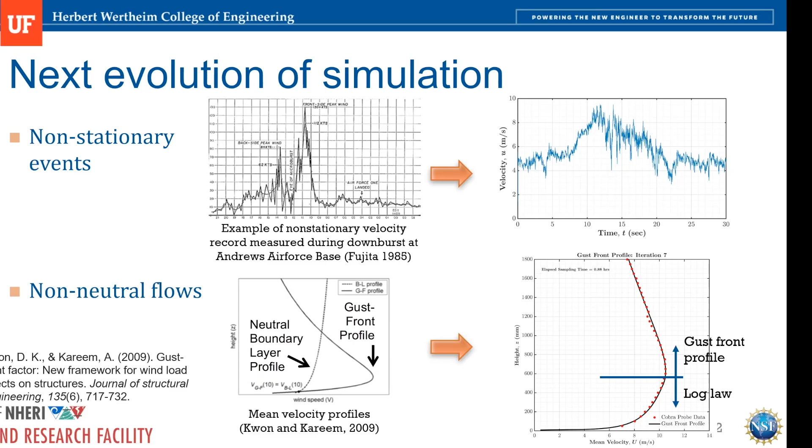We had a researcher, Sungmoon Jung from Florida State University, who was really interested in understanding how heterogeneous terrain conditions impact the flow. He took a lot of aerial imagery and applied machine learning models to turn that imagery into the appropriate terraformer configuration, to understand how those heterogeneous terrain conditions impact the flow when it gets to the test section. He did ultimately put models in there as well, but a lot of times our researchers come in wanting to understand the flow before they even start to look at the impact on the model.

In terms of the types of models we look at, we have rigid models. These aren't flexible models, they're rigid, representing the shape of the structure you're interested in, understanding the interaction between the flow and that model, which allows us to characterize the forces on that structure.

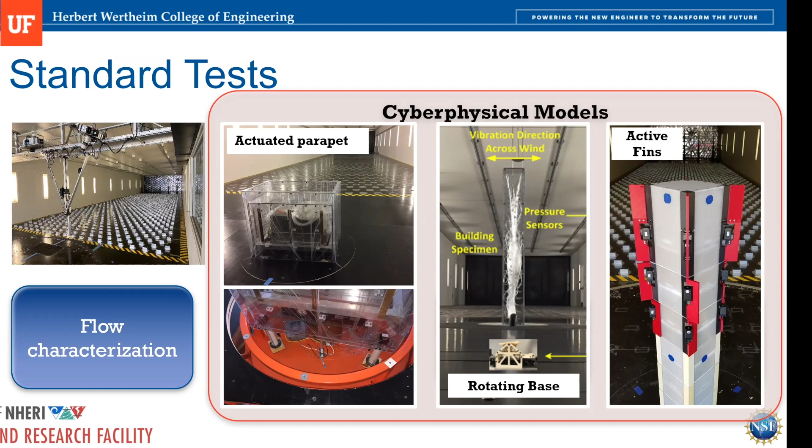In this particular test, they had noted these pine trees were more susceptible to disease after being exposed to hurricanes. So they got funding from the USDA to subject these little saplings to extreme wind conditions in the wind tunnel, then exposed them to the disease on purpose to see if there's a difference in how they respond. That was a first for us, kind of a proof of concept set of tests.

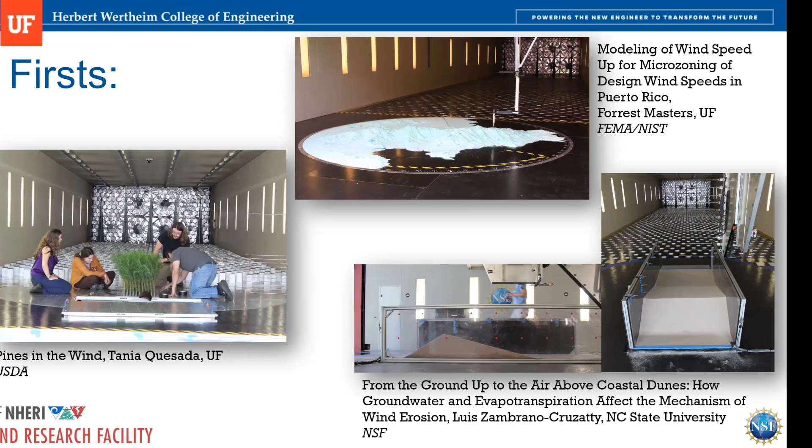In the interest of time, I need to wrap up here. We also have some instrumentation.

I mentioned the Scanivalve pressure scanning system, up to 512 taps of pressure that allow us to measure the loading on the structure. We have displacement sensors, accelerometers. For flow measurement, we have our Vectoflow probe system.

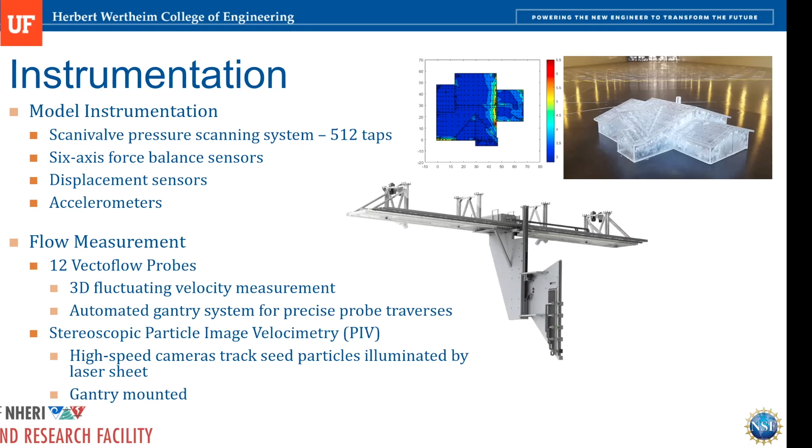These are 12 probes that can be positioned anywhere around the test section at different distances, different heights. It's all automated, so you can pre-program how you want your instrumentation to be placed in the wind tunnel.

And then much like FIU, we also have a stereoscopic particle image velocimetry system. This is where we have the laser that shines down over the test section. We've got the cameras trained on the laser. We seed the flow with olive oil, and we're able to do three-dimensional time varying characterization of the flow with the PIV.

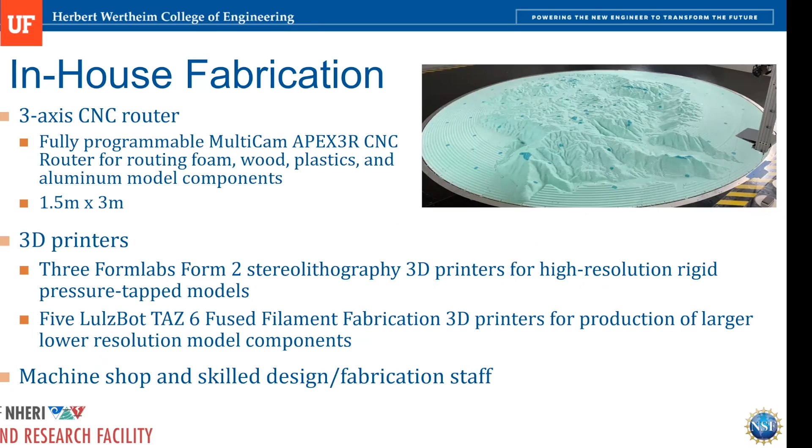We also do all sorts of in-house fabrication, both of the models and the components of the wind tunnel. We have this 3-axis CNC router that did, in this case, the foamed topographic sections, but it works in lots of different types of materials. We have 3D printers, and we have a machine shop that can work with you on the models that you want to design. They're really skilled and creative at supporting lots of different types of tests.

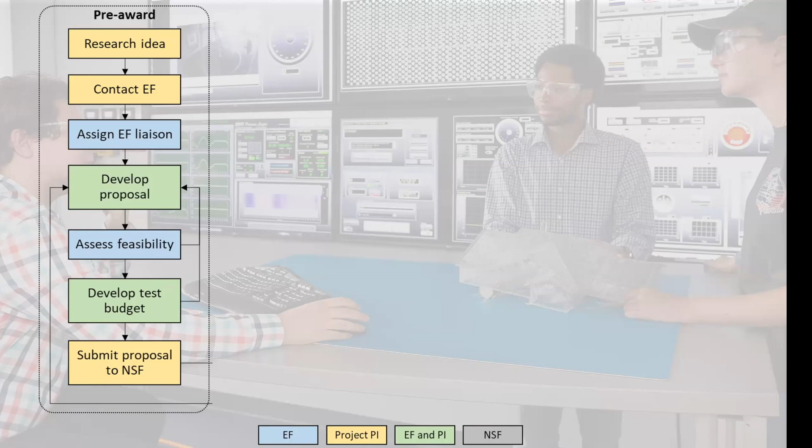So if you work with us, this is much like all the other facilities, so I'm just going to go through this very quickly. You have a research idea, you contact us, we assign you somebody to work with, and we're here to help you develop your proposal. We've been paid to help you do your proposal development, so don't be afraid to leverage that. You get it funded by NSF.

We help you work out your test plan. We help you work out a schedule. We have project planning meetings. We want to hold your hand throughout the process. We're not just throwing you out there to figure it out on your own. You come in and do the tests. Our staff runs the tests for you, but we love having you and your students here to oversee the process.

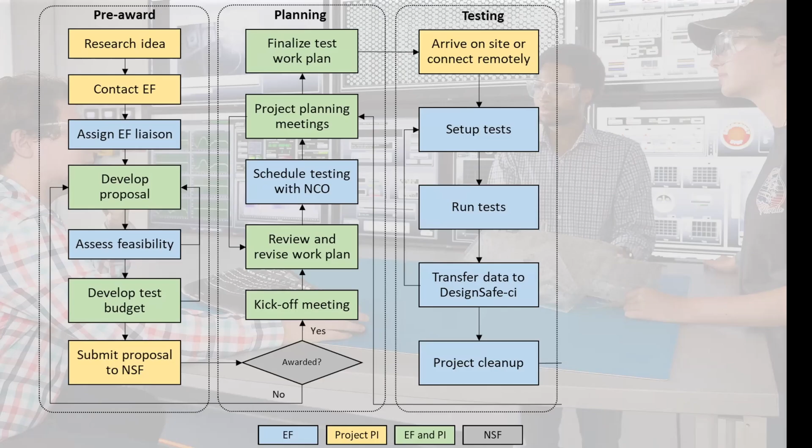All your data is transferred to DesignSafe. And then we also are there to help you as you work through analyzing your data and make sure that your results get published and disseminated. And then we think about the next time you want to come in - what's the next project idea?

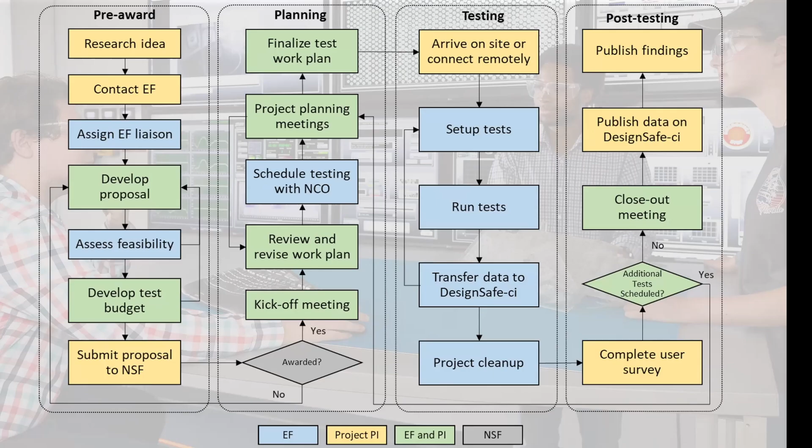So again, we're here to support you in your research. And if you want to learn more, we've got a virtual tour on our website. And of course, you can contact me or Kurt or Brian, and we're happy to walk you through your ideas, even if you're not a wind engineer. So thank you.